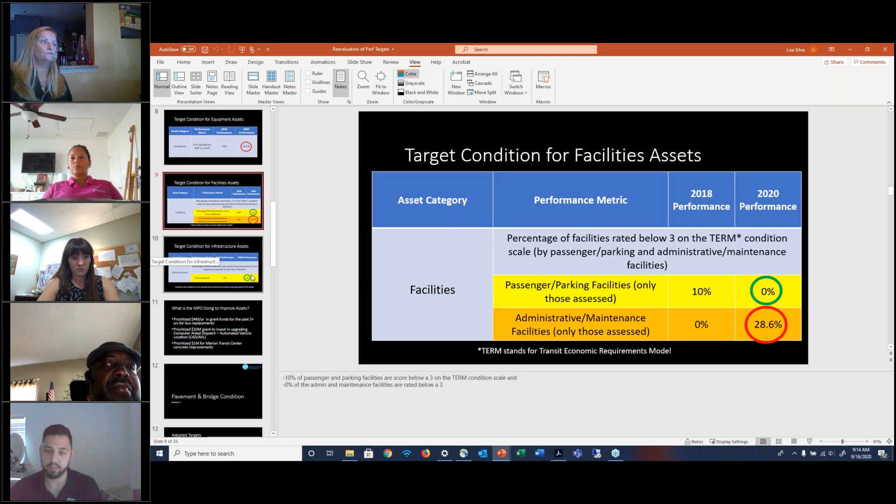The last asset category is infrastructure assets. Both in 2018 and now, 0% of the rail streetcar has performance restrictions.

HART doesn't actually own this asset, so it's not included in its TAM plan, but we reached out to the City of Tampa, which owns it, and they confirmed it's in perfect condition.

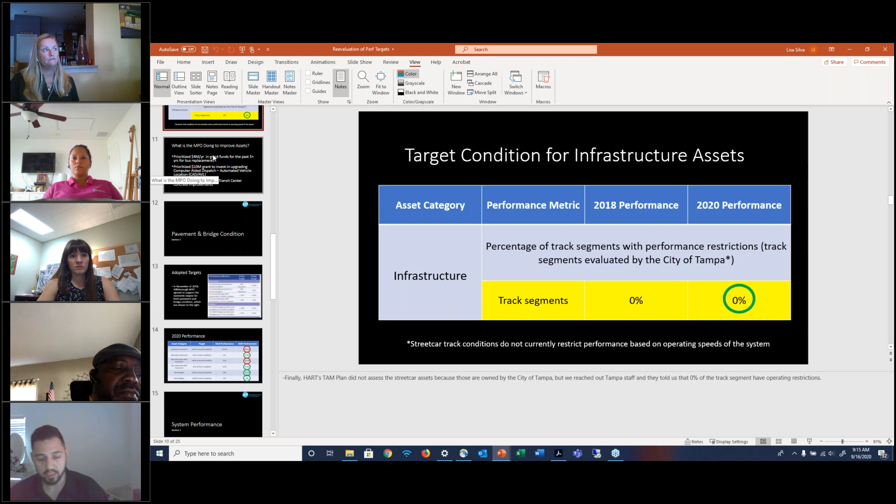The MPO is doing what it can to help improve the condition of our transit assets. Each year, the MPO prioritizes about $4 million in grant funds for bus replacements, and we've done this over the past 5+ years. We've also prioritized about $10 million to invest in upgrading the CAD AVL system, a bus location and tracking system.

We prioritized about $1 million in infrastructure improvements for the Marion Transit Center, and we're keeping our eye on that heavy maintenance facility because we know that needs to be addressed in the near future.

The second rule we have to cover is pavement and bridge condition. This performance target applies to state DOTs and MPOs, and both of our agencies are required to establish targets for pavement and bridge. Back in 2018, when we presented these targets to our board, they agreed to support the statewide target.

Our statewide targets are to maintain 60% or more of our interstate pavement in good condition and less than 5% in poor condition. Our non-interstate national highway system pavement should have more than 40% in good condition and less than 5% in poor condition. Our bridges should have more than 50% in good condition and less than 10% in poor.

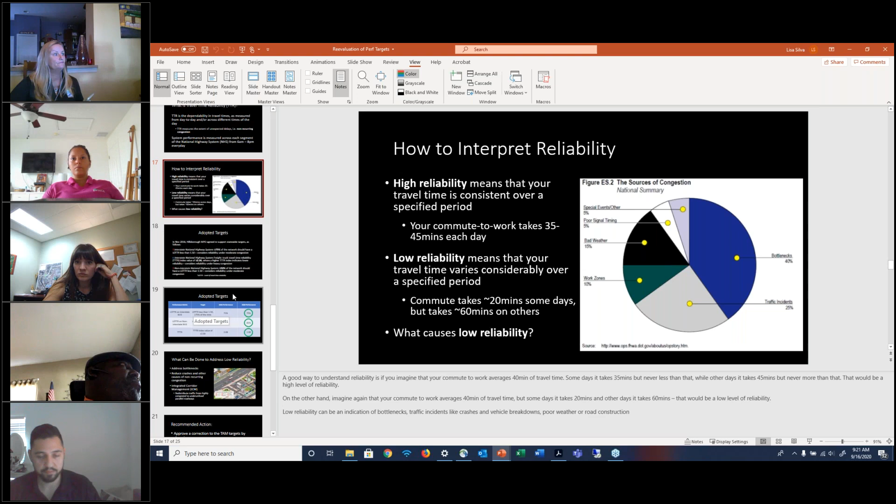All right, and to get into methodology, the way that travel time reliability is assessed is maintaining a level of travel time reliability less than 1.5, 75% of the time. So to put it in plain English, 75% of the time that you're making your commute, it should not add 50% more travel time. So my 30-minute commute should take me no longer than 45 minutes, 75% of the time.

If we're meeting that, that means that we have pretty good reliability. That metric applies to both the interstate and non-interstate NHS. The truck travel time reliability is measured a little bit differently - it's assessed on an index value. So a TTTR value of 2 would mean that during periods of the worst congestion, a truck doesn't have to double its travel time. So a 30-minute travel time wouldn't exceed 60 minutes, 60 minutes wouldn't exceed 120, and so on.

Our MPO board agreed to support the statewide targets for level of travel time reliability back in 2018. The 2018 performance was 71%, and the goal is to have that be 75% of the time. So we were not meeting it. We set that target even though it was aspirational.

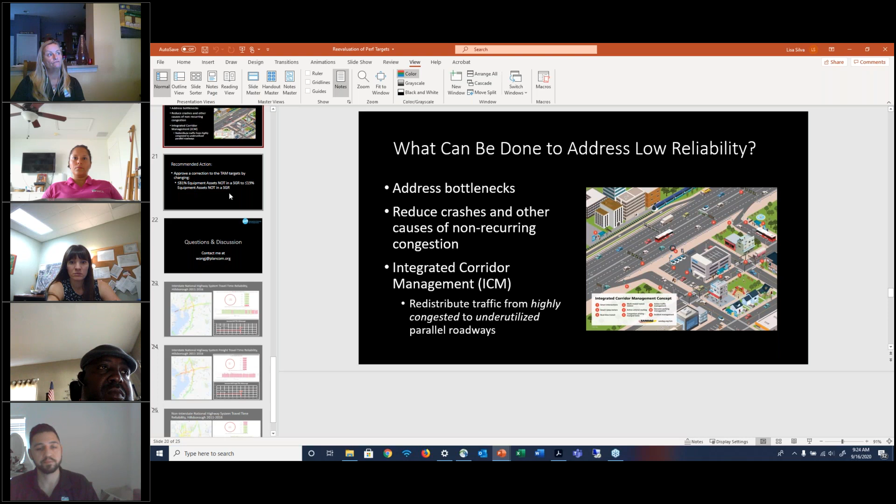Once again, this is an action item. We can't adjust the targets until 2022, but we're asking you to allow us to approve a correction to the TAM targets by changing that incorrect 81% of equipment assets not in a state of good repair to 19%. I'm happy to answer any questions you have.

Thank you, Johnny. Does anyone have any questions or comments about the presentation?

Yeah, go ahead, Arizona. You said that they're gonna replace some buses. Does that mean they're HARTPlus buses as well?

Sorry, I didn't hear the first part of that, you cut out a little bit. That you said they're gonna replace some buses. Are they gonna also replace some vans, HARTPlus vans as well?

I think Justin from HART can speak to that a little more than I can, but I was told by the asset manager that they placed an order for like 30 some 40-foot buses a couple of years ago, and they're scheduled to be delivered in the near future. As far as other service vehicles like vans and SUVs, I'm not really sure how many they have ordered or when the scheduled date for arrival is.

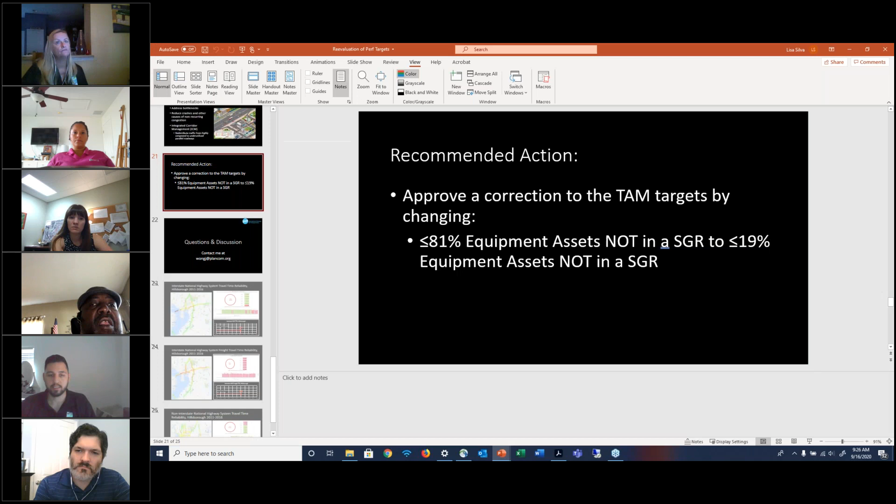Well, they need to include that too, because those vans are getting old as well. AC's going out, the lift's not working, so they need to do that as well.

Yeah, as part of preparing for this presentation, I spoke with HART's new asset manager, and his team shared their concerns with me. In addition to the heavy maintenance facility being an asset in poor condition on its own, the condition of the maintenance facility is also leading to some degradation of the buses. The humidity building up in the facility is starting to warp some of the plywood on the bus floors. They're concerned this could be an issue in the future. But until HART has a consistent revenue stream, I think we can only hope they can do the best with what they have for now.

Yeah, also when they're gonna be replacing the bus shelters, they need to put some new shelters over here on 21st Street. They are always going to the west side, Kennedy and all that, but let's not forget about the one in Hillsborough. We need some new shelters over here as well.

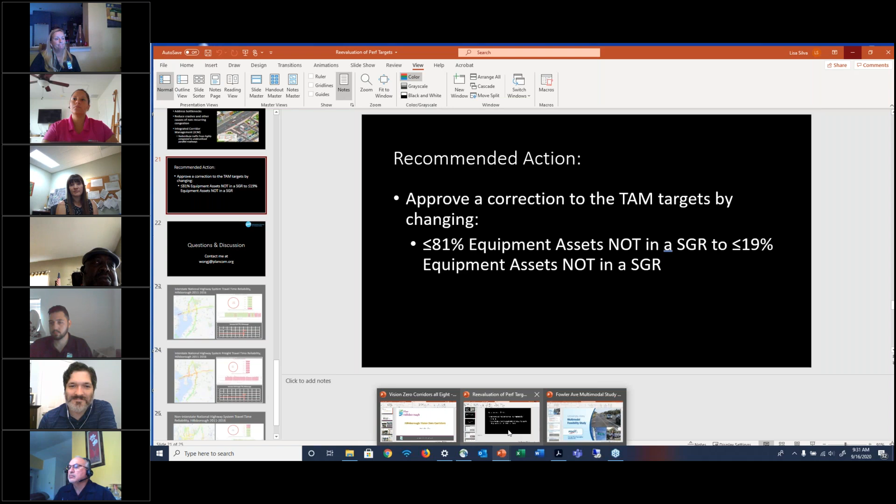Kathy Coyle, so moved. Thank you, Kathy. Do we have a second? Okay, Arizona with a second. All in favor, say aye. Aye. All opposed? Okay, thank you, I guess we'll take that as a unanimous vote. All right, thanks, thank you, Johnny.

So our next item, I think we're on the Fowler Avenue multimodal study. Do we have Ken Spitz? I am on today, can you hear me all right? We can hear you, go ahead, sir. Great, hi, my name is Ken Spitz, I'm the Transportation Planning Manager for DOT District 7 in Tampa.

I will ask, is there a way to expand the screen to show the whole slide? Because there will be some things in the future that are pretty small on that. Okay, if that's possible, I'm going to try. Having very good luck today, so I'll keep talking. You have control of the slides, right? I do, okay, we can go ahead and go to the next one.

We call this the University Avenue multimodal, University Area multimodal study. It goes from I-275 on the west to I-75 on the east, Fowler Avenue. The reason it was originally called the University Area is because it was a shorter distance than that—we had it from I-275 to about 56th Street. We did extend that later after some talking with Temple Terrace. So originally it was the University Area Multimodal Feasibility Study.

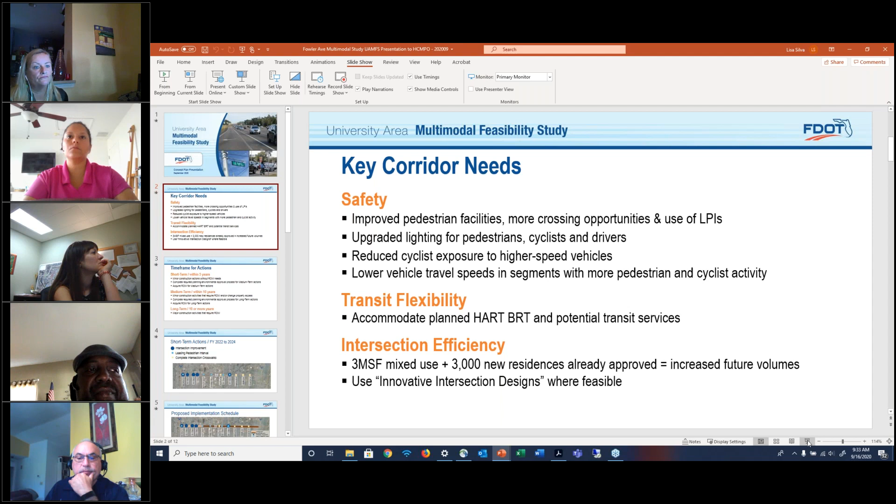We worked on this with Kimley-Horn, they were our prime consultant on the contract. First part of it was base planning work, which I won't go into a lot of detail on here since I know you want to see the concepts we're coming up with. But I'll hit on the fact that we identified 3 key corridor needs: safety, transit flexibility, and intersection efficiency.

Safety, number one, obviously we know we have both crash history with vehicles, pedestrians, and cyclists there that we need to change. It's been negative and we need to get those numbers reduced. We know we need to provide safer facilities for vulnerable users, upgrade the lighting, and reduce cyclist exposure. As you know, it's 45 miles an hour for most of that corridor, so those folks are right next to higher speed traffic. We also need to lower vehicle travel speeds in segments where there are more pedestrians and cyclists.

Also, longer term, this part of the community is planned for some transit upgrades, so we need transit flexibility to accommodate whatever might be planned. At the time we started this, HART was still in the process of determining what their BRT system might look like in phase one, and later we also looked at their longer term plans.

Being a state highway, we also need to be concerned about intersection efficiency. You may be aware we've got probably about 3 million more square feet of mixed use development that's planned and approved in that area, which includes about 3,000 new residences. When exactly those will go online is still up in the air, but that is what's planned, and we do have to account for some of that.

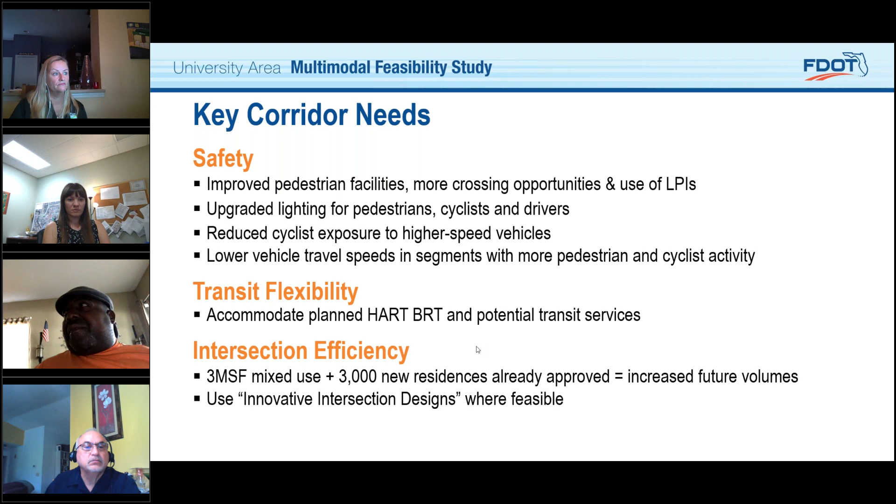So what are the timeframes for the actions I'm going to describe? We've divided those into short-term, medium-term, and long-term. That fits within 5-year buckets: within 5 years, within 10, and then 10 or more. The reason we do that is because FDOT's work program is split up into 5-year programs, so that we can schedule money and also our effort and contracting.

The difference between these is we can do some minor construction actions that do not require right-of-way immediately within 5 years. We can complete the planning and environmental approval process for the next stage during that, and then we can also begin to work on the right-of-way that we might need for the medium-term actions. That process continues through each of those phases.

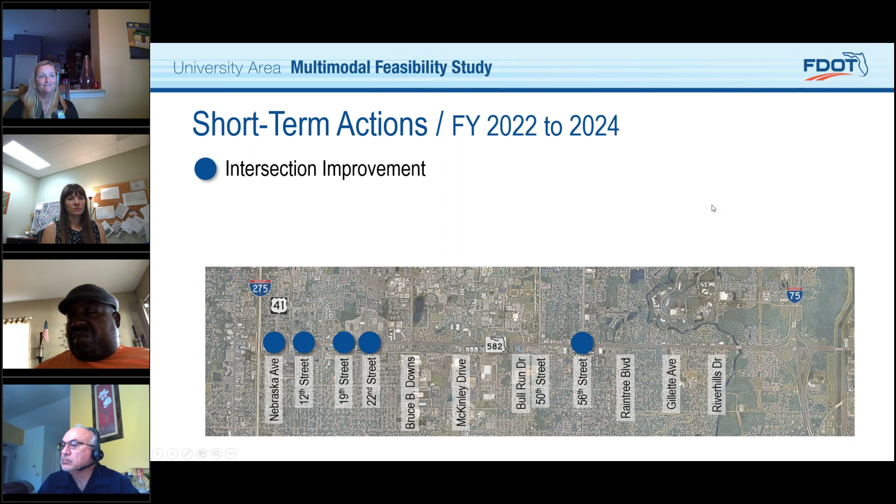So this is a map showing short-term actions. These are within fiscal year 2022 to 2024. Our fiscal year starts in July at FDOT, so actually right now we are in fiscal year 21. That gives you an idea how this falls.

What we've got here are some of the immediate intersection improvements we're looking to do. Leading pedestrian interval is a change in the signaling which gives pedestrians a head start on the green light to cross the street, while the other traffic still remains on a red. The idea is that the pedestrians are out further into the crosswalk so they can be seen more easily by vehicles and other users.

Then we've got complete intersection crosswalks. This is a bit more of a catch-all — we can be doing painted crosswalks, and we can also be doing islands for refuge for pedestrians, so there are variations here that we can do. But these are mostly improvements for pedestrians and bicyclists. You can see we have them spread out along the corridor: Nebraska, 12th, 19th, 22nd, and also all the way to Riverhills Drive.

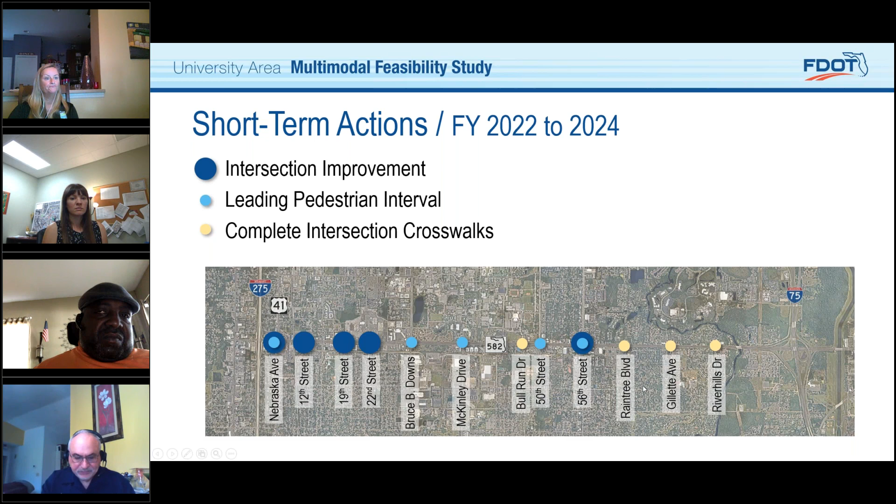So when would these take place? This is the current schedule. I'll throw out the caveat that budgets do change. We are involved right now, as all government agencies are, in looking at what the revenue impacts are of COVID-19. So I'll throw that out there, but this is what is proposed as of this moment.

You've got the different projects aligned here on Fowler that we've got in our work program, and over here at the lower right, you can see the fiscal year those would happen in. PD&E, as I mentioned, is the project development and environmental phase. That's a study we do in-house, well, with consultants, but it's run through FDOT — it's your initial planning and design work combined.

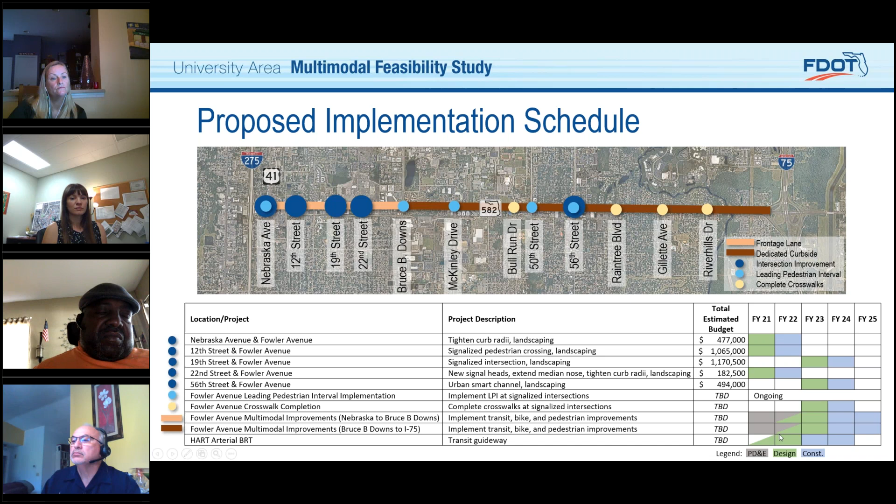Then it would go — the green are design. You'll see a couple of these, like the first few, Nebraska at Fowler, 12th at Fowler, those are already in design. Those are small pedestrian and bicyclist type projects that we can accelerate. They don't require a PD&E report, they don't require any right-of-way to be purchased, or changes to access. Those things are already scheduled to happen, so those will be in design this fiscal year.

And the blue are when they would actually be constructed. So as you can see, we've got the different pedestrian projects, and we've also got multimodal improvements down at the bottom, which implement transit, bike, and pedestrian improvements. The budgets on those obviously have not been decided yet — those are a few years out further. But these were all things that would happen within the next 5 years.

Okay, so now we'll get into the fun part. We'll talk about the designs that we've come up with for concepts. These concepts will be analyzed in the PD&E study, which will not be limited to just these three. That's part of the beauty of a PD&E - we can also bring up new ideas during that phase, which is when we do much more of the community involvement and public outreach activities. So folks will have a definite opportunity to have their voices heard and impact the design.

So let's talk about what the three concepts are that we did through the planning study. We have what's called the BAT lane, business access and transit lane. This is a lane shared between transit vehicles and non-transit vehicles, but the non-transit vehicles would be restricted to making right turns. Think of it as kind of a special right turn lane. Buses can use it to go through at intersections, but the vehicles can only turn into driveways, shopping centers, that kind of thing from that lane.

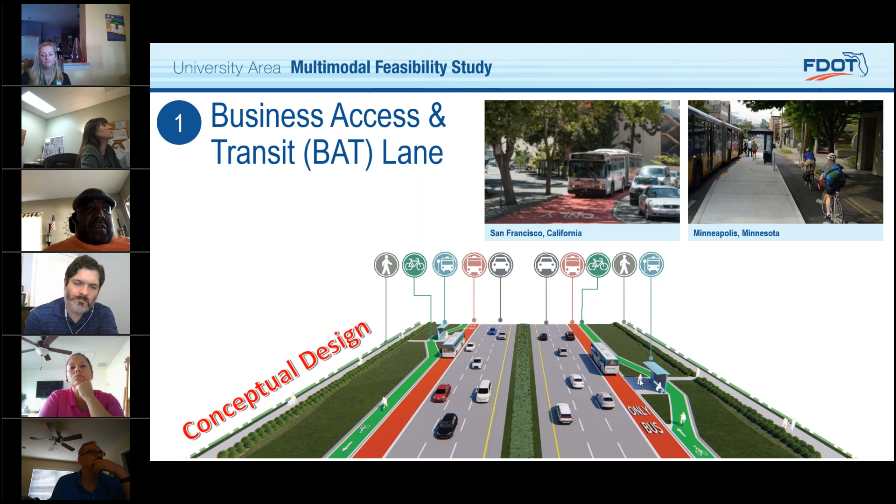I don't know, Justin, if you want to talk about the ADA requirements at the shelters. Yeah, so the same requirements apply for any kind of median station as for an outside running station. Just off screen below that station there will be a crosswalk straight across, so it's no different than any other corridor. The reason Fowler is such an attractive place for a median guideway is that it's a pretty wide stretch, maybe 150 to 180 feet, with some sections up to 220. When we talk about a culture change, this would change the feel of Fowler. Separating those directional general traffic lanes by so much space would help encourage slower speeds without impacting capacity too much, and providing transit in the middle creates a better environment since you're only crossing one leg of traffic. But ADA is not a concern for us.

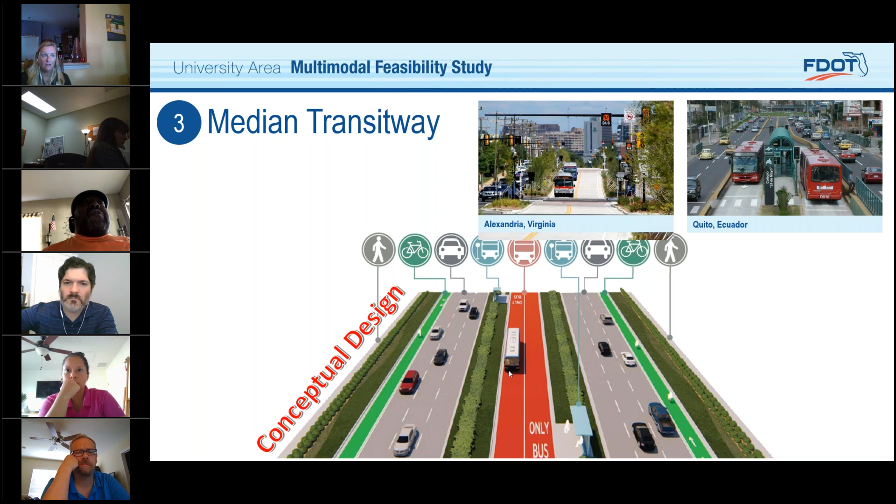I'm not talking about the color, I'm talking about loading and unloading a wheelchair in the middle. Do you know how long it takes to load a wheelchair? It takes 2 to 3 minutes to load and unload. The lift has to be level to the ground, it can't be too much of an incline. If the lift is on an incline, the bus ramp could cause the wheelchair to roll too fast toward the middle and someone could get hurt. So you need to make sure you know what you're doing when you're putting the lift in the middle.

I think I have the answer you're looking for—I'm sorry, I think I misunderstood your question at first. One of the things about BRT is that we hopefully will not be using the lift or deploying a ramp, because we will have level boarding. You'll be able to roll right onto the bus because when it pulls up to the station, it won't have to kneel or deploy a ramp. Whatever the requirement is for the gap, it should just be an inch or two.

And then you'll roll right onto the vehicle without any ramp needing to be deployed. That's one of the best things about the stations with BRT, is that you have that level boarding, much like you would on a light rail or commuter train.

So you roll right on, and we don't have to deploy a ramp, which reduces the amount of time we spend at each station. All you really need to do is secure the wheelchair on the vehicle instead of deploying the ramp, rolling it on, and bringing the ramp back in. So I think that addresses your concerns.

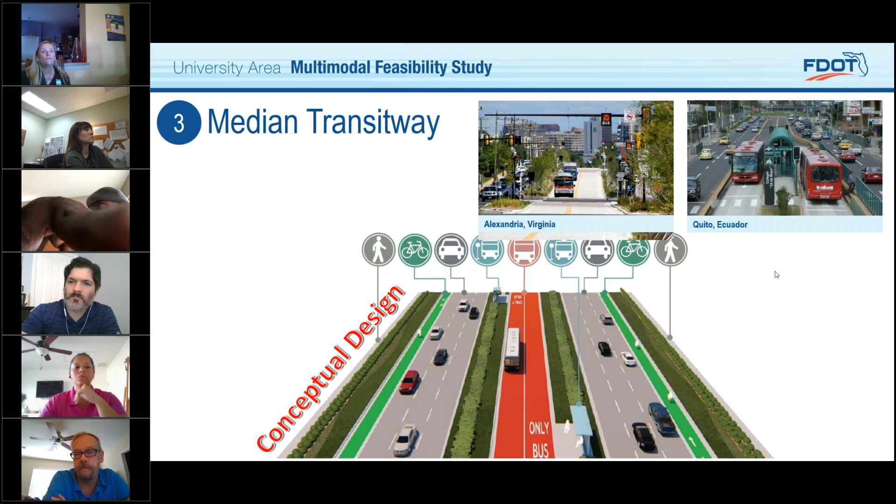Thanks, David. Cal, you had a comment? Yeah, just the parkway idea with the frontage roads - that's interesting, I never thought about that for Fowler.

If people are looking for examples, they have a few pictures up there. There's a lot of these in the Brooklyn area - Eastern Parkway is one, I thought it was called Brooklyn Parkway. And one other thing to point out, when we're talking about median transitway and other things, putting the transit on the side has limitations too, because what we're not seeing on this is driveway cuts and things like that. So just know there are trade-offs either way.

But yeah, I think they all, to be honest, are pretty interesting, and I'm kind of excited to see what happens with this, because there was a lot of thought put into this. So good job to the team over there. And that's it, thanks Cal.

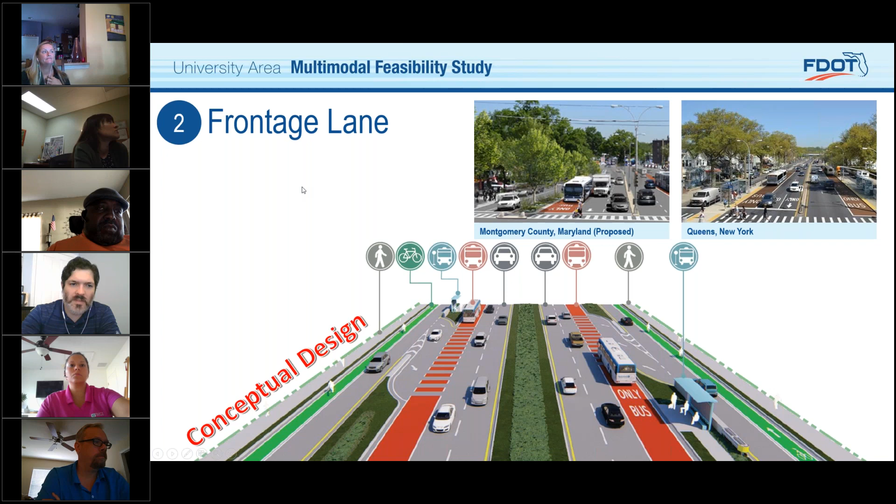Sarah Hendricks asked if there is a proposed maximum speed limit, or any proposed changes to what the speed limit currently is. Yeah, thank you, I did forget to mention that. One of the things we're looking at in this whole corridor, especially the western part, say from 56th west, we would like to get to a target speed here of 35 miles an hour as the posted speed.

And some of those concepts that you've shown, including the Arterial BRT one showing an 11-foot lane. We're looking at whether, although we have room to do full lanes, especially in that western section, we could use either 11 or perhaps 10.5-foot lanes for the travel lanes. We realize that to get actual compliance with reduced posted speeds, you also have to change the geometry of the road.

So we specifically didn't show widths of the lanes and medians in our concept, because we wanted to present it as a concept, and because the actual design will be based on what comes up in the PD&E phase of the study. But that is a key aspect. We would like to see 35 miles an hour for most of that corridor as the posted speed.

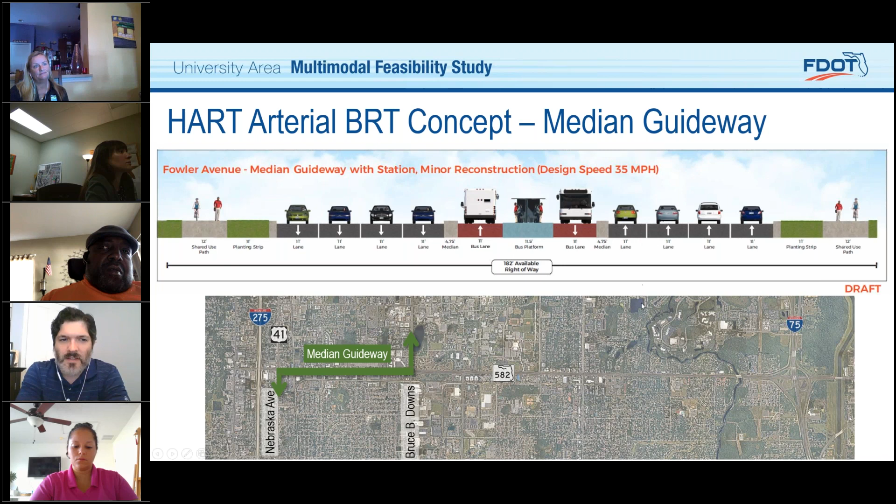Great. My last question is about outreach - what's the next step? There's a lot going on up there: the Innovation group working at University Mall, a lot of development at the VA and USF, but it's also an economically distressed area. So what's the next phase of outreach? You have very different populations and entities off of Fowler Avenue with a stake in this.

Absolutely. During this phase we did have outreach with the campus, as I mentioned earlier, and also with the Innovation District with Mark Sharpe's group. I'll say you guys were second on our list - we got to you next.

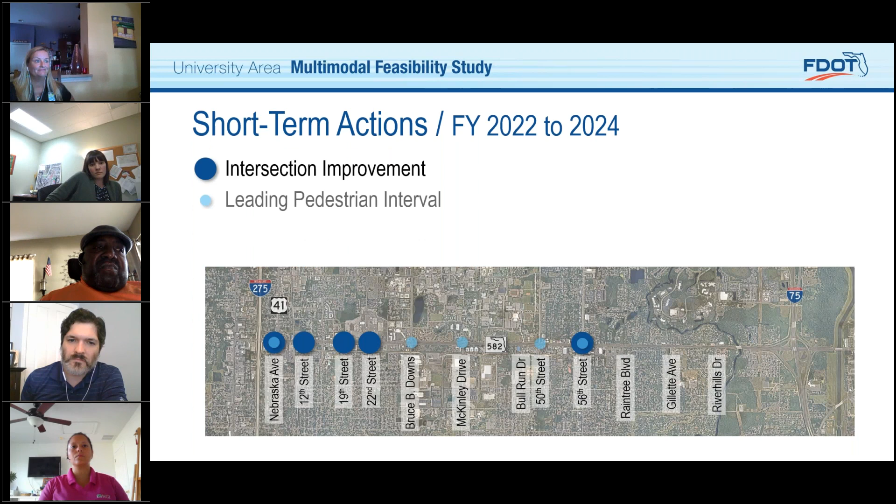We did have a presentation a couple of weeks ago with the Innovation District. They sponsored it, kind of like a real estate breakfast thing, with most of the developers, movers and shakers, and business folks in that area. There were representatives from the hospitals, the campus, and several businesses - I believe Busch Gardens and some others. Yuengling had people there too. So they were the first ones to see this summary presentation you've seen here.

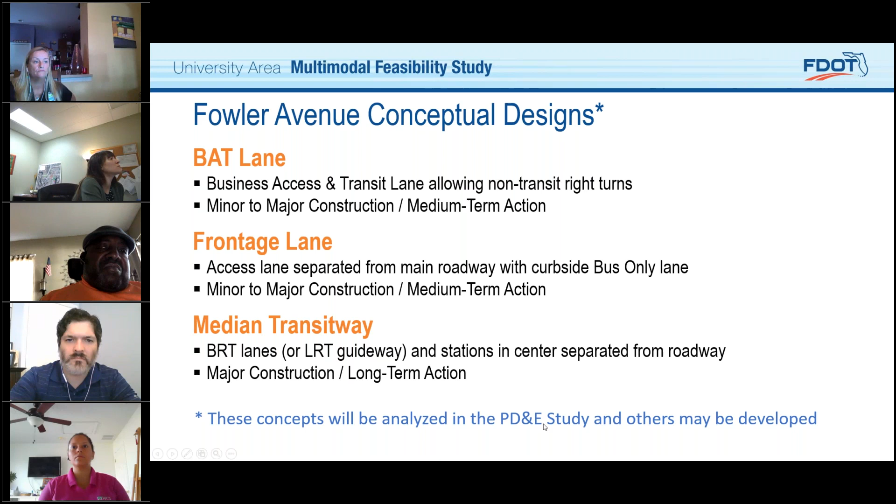As we go forward, we'll be doing more committee meetings with the MPO. I don't know that we've got one scheduled before the board yet, but the first stage is showing the summary like we've done here and talking about the process. Then as we enter the PD&E stage, you'll have the whole host of typical public outreach - identifying neighborhood groups, working through local governments, the county, city of Temple Terrace, and the university. There will likely be hearings at that point, and public outreach efforts to get input - the whole normal range you have with a PD&E.

Ken, this is Lisa. What's the timing on the PD&E, so we know when that public process will start?

The only thing right now - and I'll be a little iffy on this - I think we're working on the procurement part of that. So it's just a matter of advertising it and going through that process. It's still scheduled for this fiscal year, so we've got until next July, I guess, to get it started. It should be coming up pretty soon.

To get feedback on the different concepts, watch for the open houses and hearings for the PD&E. And on some of these safety improvements, those should happen within the next calendar year - within the next 12 months. We'll be getting those because, as I mentioned, those are already in design. So some of the pedestrian improvements you'll start seeing within the next 12 months.

Great, this was very informative. Thank you so much. And I want to follow up on one thing.

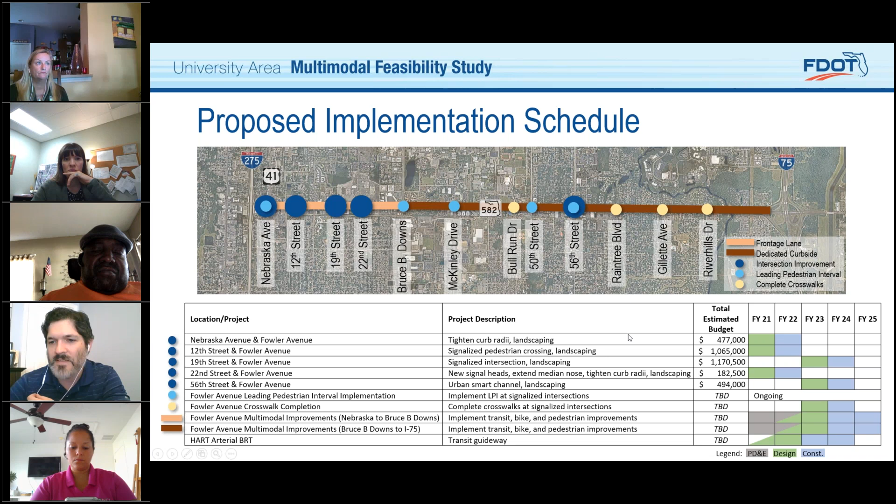I think the UACDC, University Area CDC, includes part of Fowler in their service area. So if you haven't spoken to them, I think that's got to be the best path forward in terms of getting the neighborhoods involved, just because they have a lot of interest in walkability and connecting some of those entities, especially behind University Mall, some of those neighborhoods. I think they've done similar presentations about accessibility and walkability. That would be the last thing. Thank you.

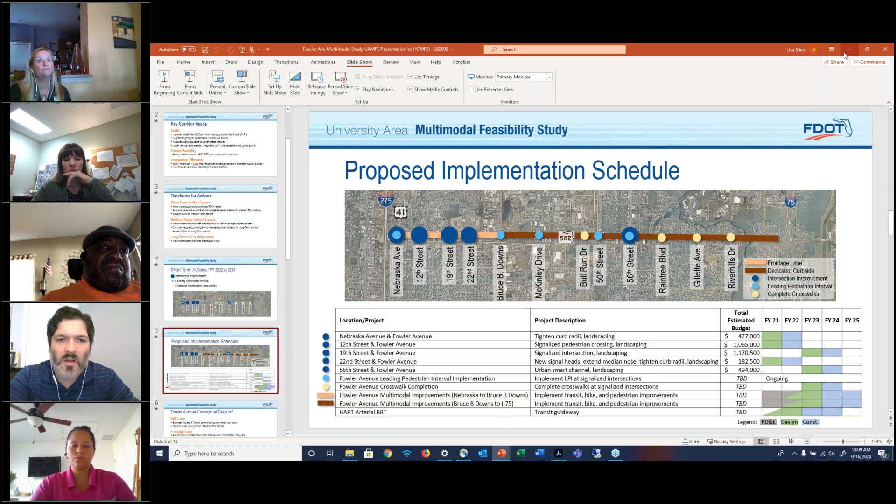And then Lisa, are we on the presentation for West Shore Boulevard, or are we skipping that? I did not receive that, and I do not see the staff member that was to present that. So I guess we're going to count Hillsborough County as a no-show today and move on. They had previously communicated after I'd sent the agenda that this school safety initiative was something they were not able to do with all the work they're doing to open the schools and get everyone safely to and from school. So they deferred that to this fall. So you'll be hearing more on that, but it's coming in the fall, and I'll circle back with Bob Campbell and reschedule West Shore Boulevard.

Unfortunately, I know from seeing this presentation at Michael Marino's Transportation Committee that they're anticipating their public open house to get the community's feedback on the cross sections they've designed for their complete street. As soon as I get confirmation of when that date is, and it will be virtual, I'll blast it out to the Livable Roadways Committee. They were anticipating 95% sure that it would be September 30th in the evening, but again, I don't have those details. So I will, at the minimum, get that to you as soon as I'm able.

All right, guess that means I'm up next. Okay, go ahead. Okay. Praying this works again. Yay.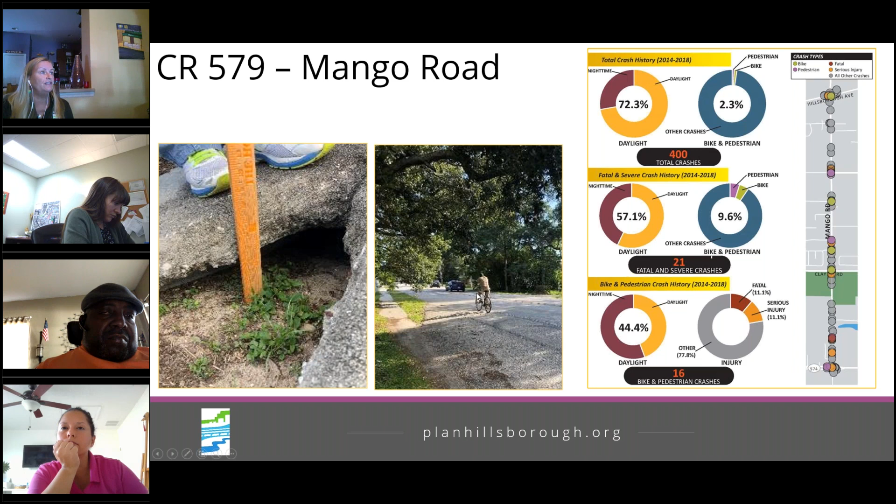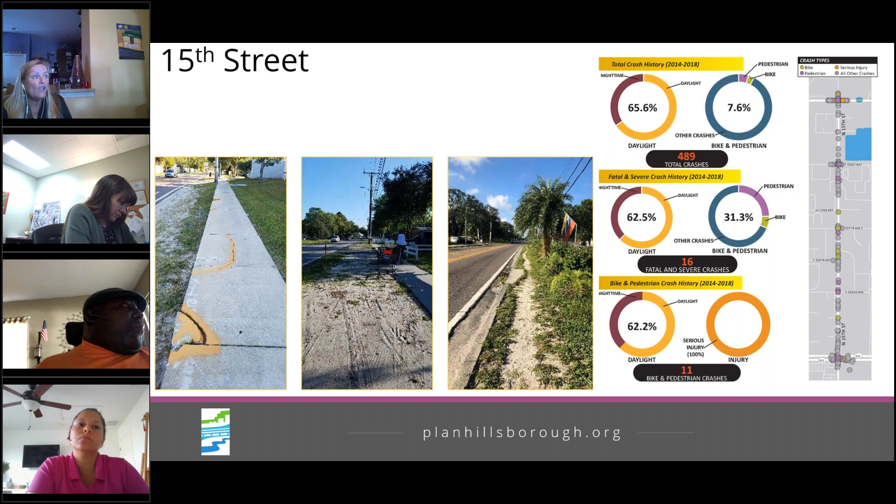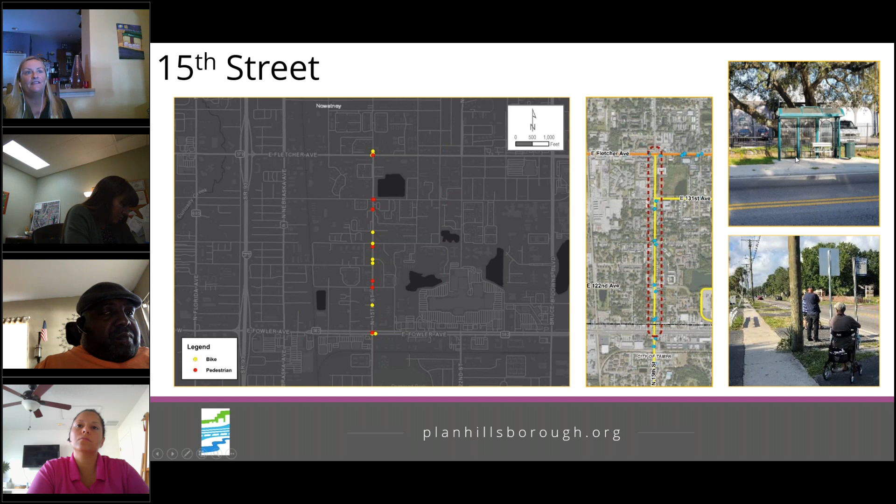He also has 15th Street. I texted him during Ken's presentation because Justin mentioned that 15th Street was going to be one of the BRT potential locations for stations. So again, knowing all this stuff as we look at and analyze the corridors is good. Again, we have total crashes, how many fatalities, and the different modes of the crashes. We've developed these into flyers to distribute along the corridor, besides our big virtual push on each corridor, which I'll get into more detail on. And we've got mapping of the locations of the crash and type.

He's got Gibsonton Drive down in the South County area. Our other planning studies have been considered and folded in, so the Gibsonton community plan and the vision for that effort, and the different work that Hillsborough County is doing in the area, is there. Again, our little visual infographic highlights the types and total crashes and the different modes to help people digest and understand what's going on. His last, fourth corridor is 78th Street. Again, images from being out in the field. This one has a school along it. One of mine has a school along it as well.

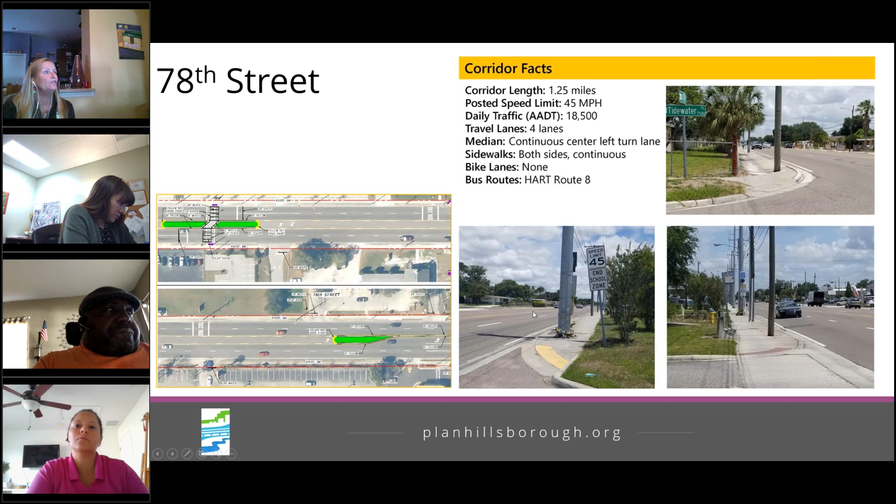Again, in this time of COVID, we're trying to be as creative as possible. So moving into the four corridors I'm managing, we have Bruce B. Downs, up in the Innovation Place area. We attended a virtual meeting on different real estate venues, like Ken, and let them know about our project.

We've got the types of crashes, the length of the corridor, the type of layout for the corridor. Here's the infographic that explains it, and hopefully it's enticing enough to get the community to go weigh in and give us their feedback. Because we've got data, but we don't live and work along the corridor. Plus, when we go out to review in the field, we're only going at one time of day, and during COVID, so we're definitely trying to seek the community's input.

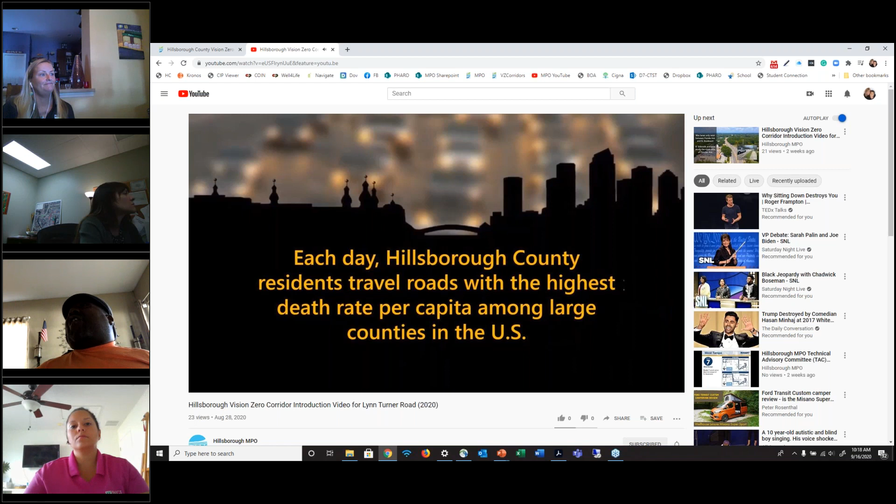Because we're doing okay on time, you get to enjoy a couple of those. I'm going to just show you part of it, and I hope you go back and see the rest. When you click the link, it'll take you to the MPO's YouTube channel. We're on webinar, so it goes much smoother when you're not on GoToWebinar. Okay, it's not liking it then. Okay, we won't endure that whole thing, especially since it doesn't like this. This one's embedded, so maybe it'll work a little better.

This one is for Sheldon Road. Okay, and from there it goes on to highlight what's going on the corridor. So let's see, back to here.

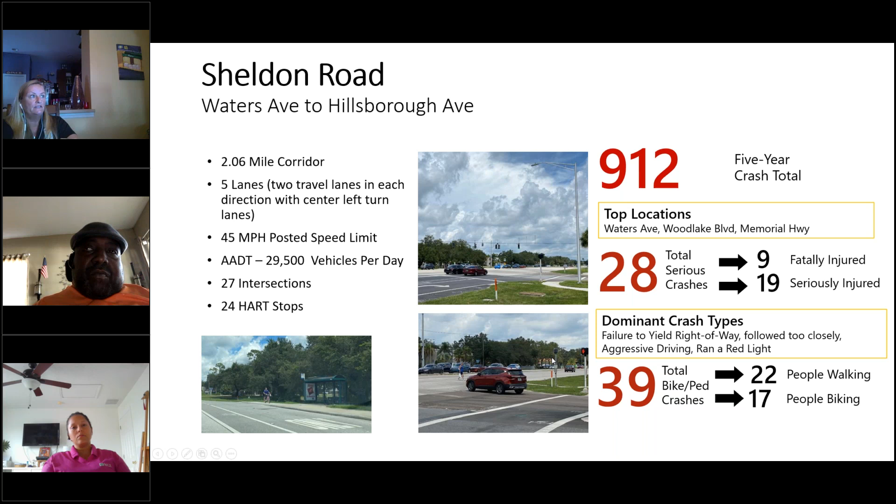Unfortunately, we had a three-fatality crash last Tuesday, and I live near Sheldon and Linebaugh, just outside the study area. Sheldon and Linebaugh is just north of the extents of our study, but because of the crash along the corridor, and because of COVID, I got creative and put the fact sheet in our community newsletter, which here's the face of. That goes in every one of my neighbors' driveways once a month. So we scrambled and met the publication deadline to get this flyer into it. Some of the neighbors work at the news stations in our community, and they shared the flyer, so we got called, and I had to do a couple of interviews with that.

So that helped. And then what we're doing too is contacting churches and community groups to get the link posted on Facebook pages. So when I remind you and send you the flyer again after this meeting, if you could do the same thing and help get it distributed amongst the community for the eight corridors, we'd really appreciate it, because with COVID, we can't go meet with them in person.

Anyway, here's a little image of the flyer that went out in the Constant Contact blast, and we've been highlighting it in our materials. But again, if we go to planhillsborough.org and Google Vision Zero corridors, or just type in Vision Zero VZ corridors, it takes you to all eight of the surveys. We're running our survey until September 30th, the end of the month. We're going to take that feedback, and like I said, we're bringing the low-cost engineering solutions back to you guys for review in probably two months.

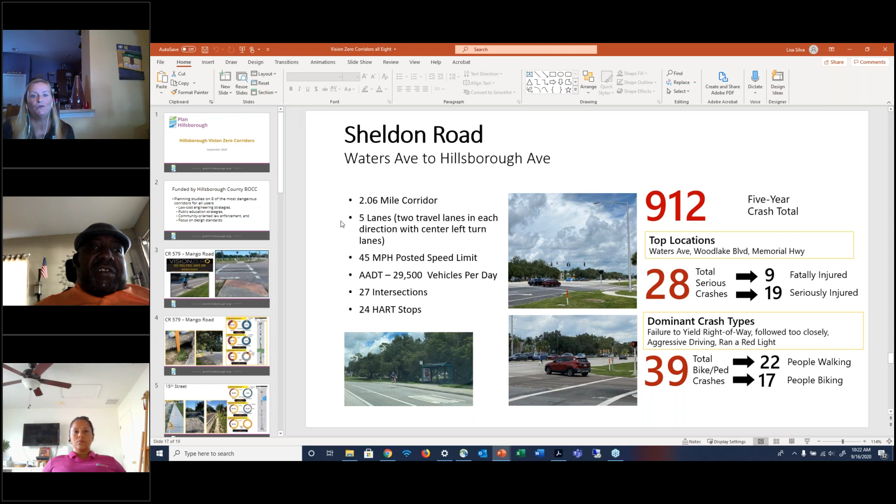Thank you, Lisa. I want to make a comment on the Sheldon Road part, because I saw your interview and I think you did a great job. You think of the things that are striking and hard to deal with, in terms of how old and how long some of these roads have been in bad shape. Lynn Turner Road has been a bad road for like 30 years. I remember my family looked at houses off that road in the 90s and they thought it was too dangerous a road back then. And Sheldon is getting worse and worse over the years. That's the part of the county where I grew up, so it's happening all over the place, but thank you for that.